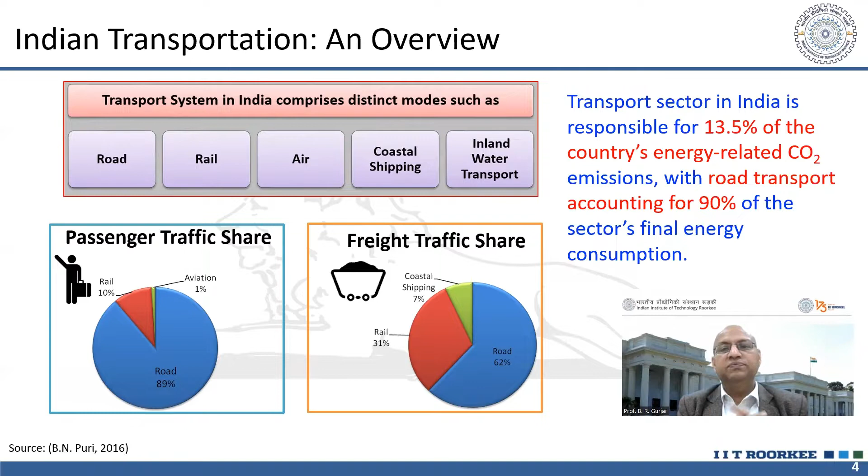If we look at energy-related CO2 emissions, around 13 to 14% of India's energy-related CO2 emissions come from the transport sector. Of this share, 90% of that 14% is basically from road transport. That's why road transport is very, very important to target.

If you look into the distribution of sector-wise action plans under NCAP, which is going on in different states, you will find that transport-related action plans are 38%, and road dust management related is 13%, so total 51% of activities are related to transportation basically. Again, this is a predominant sector, and its significance lies in that.

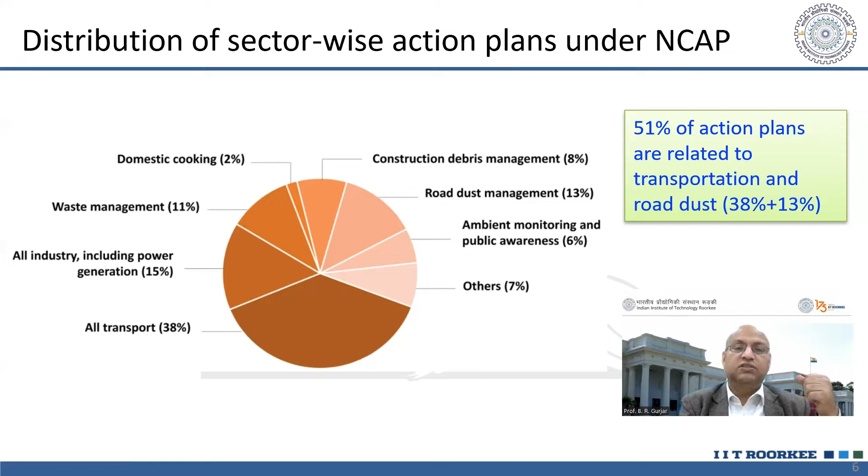I believe, or I hope, that after attending this presentation, participants will be able to understand the correlation between the transport sector and air pollution. There are many other sources, but you will understand the relationship between transport emissions and the air quality of urban areas.

You will also be able to analyze transportation generated air pollution in cities category-wise, such as how much comes from heavy vehicles, or how much from two-wheelers, etc.

You will also be able to appreciate conventional and innovative mitigation measures. Conventional means micro-level focused, short term approaches, while macro-level innovative measures include new urban transportation systems like transit oriented development, BRTS, MRTS, and similar approaches which we will look into.

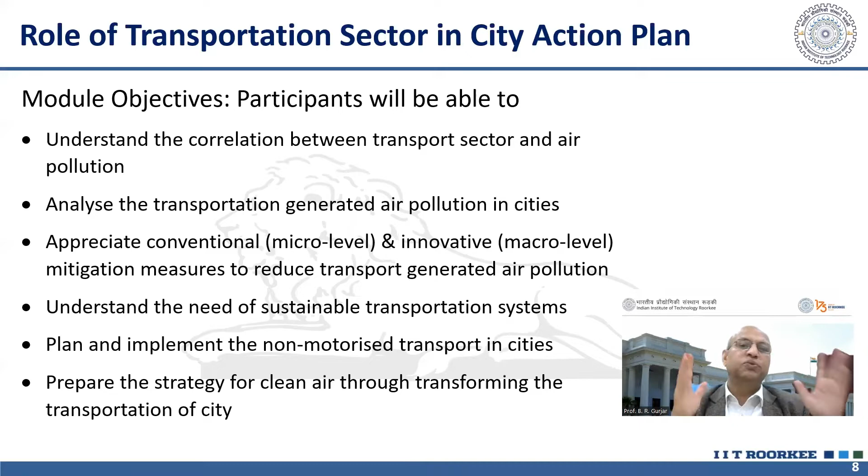So to meet these objectives, we have these modules and sub-modules to look into, like correlation of transportation and air pollution, which will have two sub-modules. One is urban setups and transportation systems in Indian cities, which we will look into because each city has a characteristic kind of transportation system.

Then energy and fuel consumption in transportation, how much there is, and what is their contribution into emissions. Then we will go for practices for curbing transportation generated air pollution.

That will include curbing air pollution through micro level approaches, and curbing air pollution through macro level approaches. Macro level approaches will include focus on non-motorized transportation systems and public transportation modes, as well as transit oriented development like MRTS, BRTS, etc.

We will look at curbing air pollution through technological approach as the third one. We will give one example of electric vehicles. Otherwise, there are other technologies also.

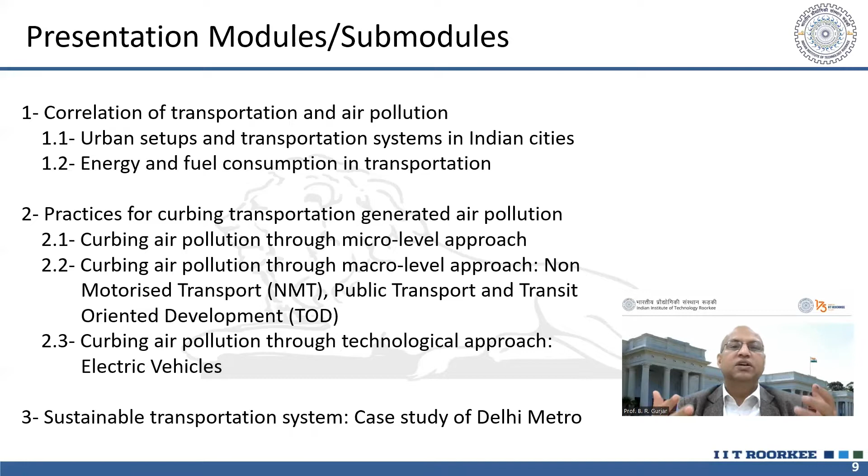When you change the fuel, when you change the engine, even when we go from BS4 to BS6, basically we are using technology to reduce emissions. Then ultimately we will go for sustainable transportation systems with a case study of Delhi Metro, and how it is being used for enhancing sustainable transportation.

So the first module of this presentation is correlation of transportation and air pollution. If you look into the main sources of ground level ambient concentrations of air, that comes predominantly from the transportation sector.

If you look into power plants, they emit at very high elevations, with chimneys or stacks, so their emission comes at high levels. When pollution comes to ground level, it is almost diluted. But transportation related or vehicular emissions are at the height where we are breathing, so that's why it is more dangerous.

Pollutants like CO or benzene are found not only in ambient air but also inside transportation modes like cars. People may think that being in a car means they are safe and not inhaling pollutants, which is a myth. If you measure with good air pollution monitoring sensors, you will find there may be a lot of pollution inside the car also.

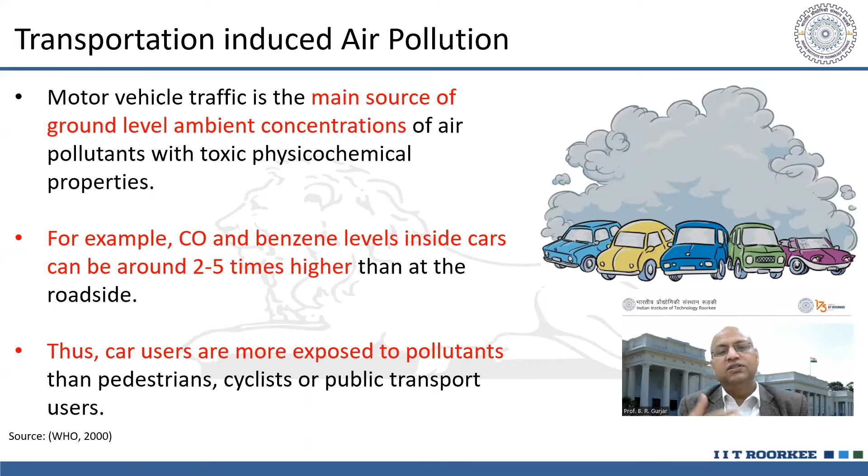There may be other sources of indoor nature, like benzene, CO, or hydrocarbons found in high quantity. When we look into traffic generated air pollution sources, there are exhaust emissions from the tailpipe, and non-exhaust emissions, like resuspension of dust. When a vehicle travels on a poor pavement, dust resuspends and adds to particulate matter.

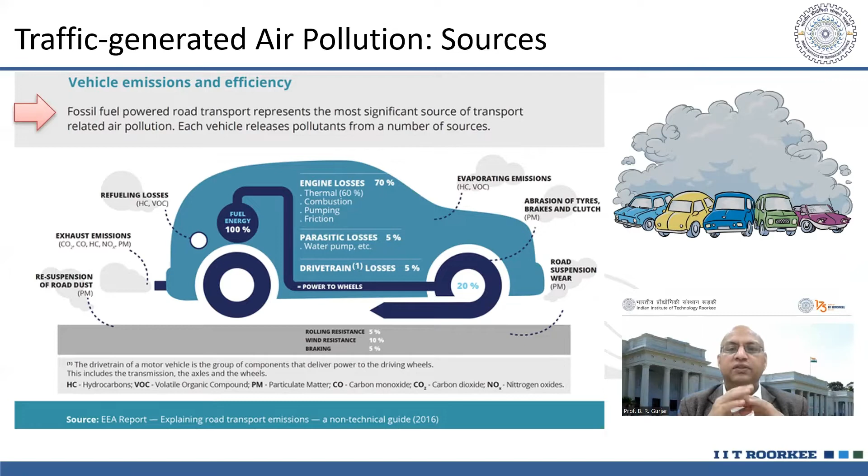There may be emissions from friction of the tire and road, so some sort of pollution will be there. There may be heavy metal emissions from application of brakes. There may also be fugitive emissions from leakage of the engine, fuel leakage, and whenever we are filling our vehicle or car. So there are exhaust emissions as well as non-exhaust emissions.

The pollutants have signatory pollutants for specific sources. For example, if you are given two tables, one having high quantity of particulate matter or SO2, and another with high CO and NOx concentrations, you will quickly say the second table's site could be near a highway, because CO and NOx emissions come largely from vehicular emissions. Pollutants like fine particulate matter, PM2.5, PM10, NOx, CO, and NMVOCs (non-methane volatile organic compounds) come in large quantity from vehicular emissions.

There are other trace emissions also, like methane or CO2, and sulfur oxides are also there, although now we are using ultra low sulfur diesel fuel in several cities.

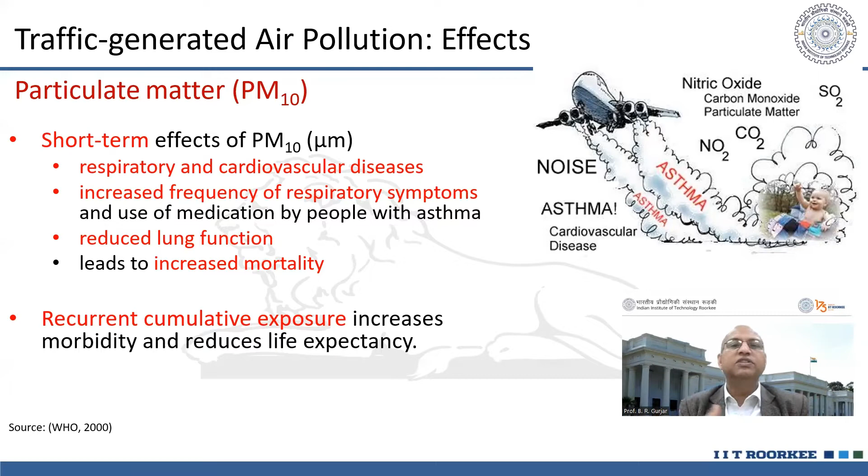If we look into their effects, they may cause several kinds of respiratory problems, like asthma, or trigger other allergy related issues. They can also affect lung function, and ultimately result in cardiovascular problems or even death. So air pollution has very damaging effects on health as well as on the environment.

Environmental effects could be in several forms, like acid rain or climate change, and even these emissions, if they go into the stratosphere, can damage the ozone layer. So the impacts are multifold, and in many ways you can relate the negative impacts of air pollution.

When we go for determinants of traffic generated air pollutants, which govern or influence how much emission of these pollutants will come from the vehicular fleet, there are factors like how many vehicles are on the road. So the number of vehicles will determine how much pollution is there.

Age of the vehicle matters, because if you are driving an old vehicle, it will emit more emissions, while new vehicles emit less. Maintenance and inspection related issues may also arise, and that's why old vehicles are discarded after some time, because they are highly polluting or highly emitting sources.

Then engine type and condition matter, like for example 2-stroke versus 4-stroke engines in two-wheelers. When fuel efficiency is good, per kilometer emissions may be less. That's why people are going from 2-stroke motorcycles to 4-stroke nowadays, and most two-wheelers are now four-stroke engine-driven vehicles. So engine type also influences the emissions.

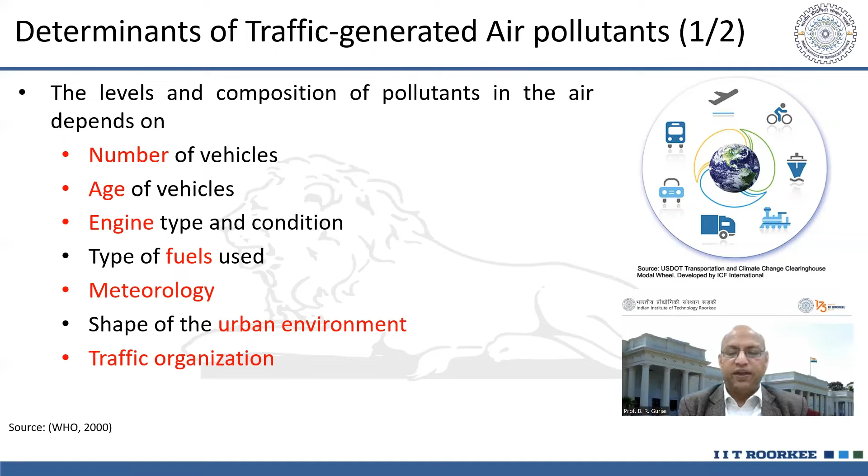Similarly, the nature of the vehicles matters - heavy vehicles, trucks, etc. emit a lot more pollutants compared to light vehicles. For example, when comparing a car with catalytic converter, a diesel truck produces around 50 to 100 times more fine and ultra fine particles per kilometer traveled. So the size or type of vehicle is also responsible for this variation in traffic generated air pollutants.

Modern diesel engines emit less PM2.5, but a larger number of ultrafine particles than older engines. This is tricky, because the mass concentration is reduced, but the particle number is increased. So you may be inhaling more small, ultrafine particles, and that may be more dangerous. It is under research nowadays whether those engines are good or bad, and this debate is going on because more data is needed to conclude.

But of course, if we are inhaling very ultrafine particles, even if the mass concentration is less, those particles have the chance to go into our blood cells, and they may have negative impacts on our respiratory system, lungs, etc. They can go into blood, and if they are toxic or carcinogenic in nature, they can create other problems. So ultrafine particle number, rather than particle mass, is more important. We have to give due consideration to them, as they have very adverse health effects.

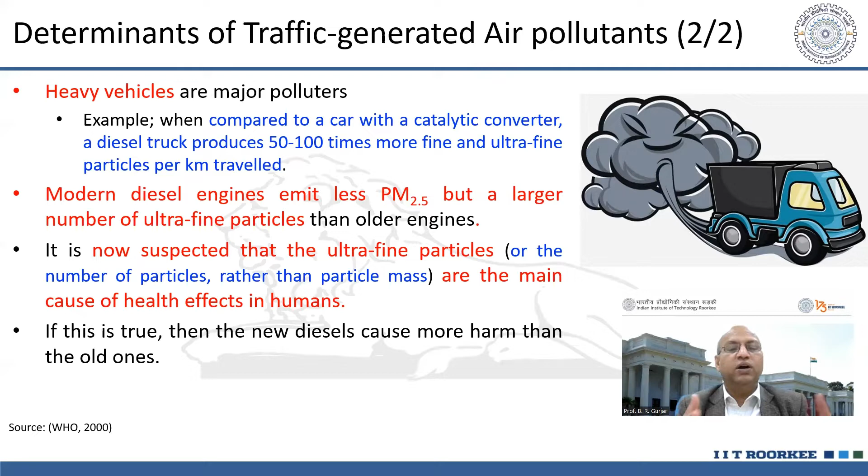That is why new diesels cause more harm than the old ones. This kind of opinion is going on in the community of researchers.

When we talk about health and environmental impacts of air pollution, physical activity is restricted when we are not in good health. If we have respiratory problems, sneezing, irritation, eye irritation, running nose, etc., we are not able to focus on our work, and our efficiency decreases. There may be asthmatic problems also.

In winter, a lot of pollution is there. Some allergens may be there, and people get into the trigger of allergic reactions. Cardiovascular diseases could also be there, and there is literature which links air pollution to lung cancer, or ultimately mortality. It can reduce the average age also.

As you know, like food or water poisoning, they give immediate effect. If you have consumed contaminated food or contaminated water, you will have some problem like loose motion, those kinds of things. But if you are inhaling this polluted air, unless it is very acute exposure, like the Bhopal gas tragedy that happened, otherwise small concentrations if we are inhaling, then slowly it gives us very negative health effects.

Maybe in polluted cities, the average age is decreased by 5 or 10 years. You don't know where those years have gone, and it has been taken by the air pollution.

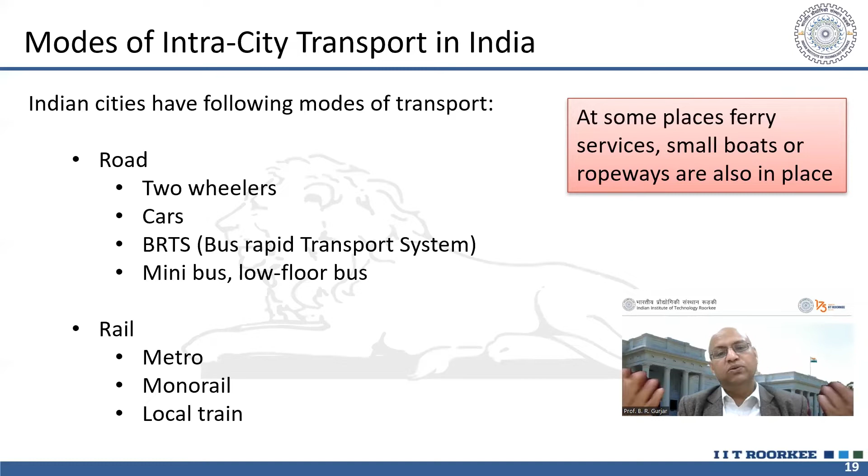Now, if you talk about urban setups and transportation systems in Indian cities, as I said earlier, road transportation is the dominating sector, meaning two-wheelers in large number, cars, or BRTS (bus rapid transport system), or mini buses, low floor buses. If you talk about rail, then it is like metro, monorail, local rail, several kinds of rail. Now high speed rail is also coming, and people are also talking about hyperloops, but they are in experimental stage.

So naturally that leads to high pollution levels. If we talk about the share of the types of motorized vehicles in India, two-wheelers are responsible for around 75% share in Indian transportation, followed by private cars.

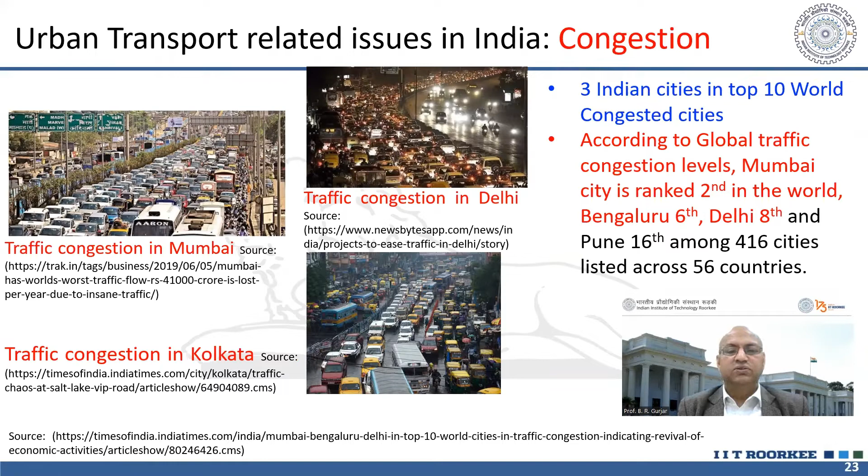If you want to visualize the stage of congestion, 3 Indian cities are considered among the top 10 world congested cities - Mumbai, Bengaluru and Delhi at 2nd, 6th and 8th rank among the 10 most congested cities in the world. These situations warn us that we have to do something to relieve the space in these cities.

When we talk about air pollution, we have earlier also seen that the transportation sector, basically road transportation, is responsible for more than 90% of CO2 emissions. The second is civil aviation, and then railways. So huge scope is there to do something about road transportation to reduce the emissions.

When road accidents are considered, around 151,000 fatalities occur annually. This is a huge figure, and they are mostly young fellows, which is a kind of tragedy - the whole family gets disturbed and affected. India accounts for around 6% of global road traffic incidents or accidents, and 70% of accidents involve young Indians, which is a very pathetic situation.

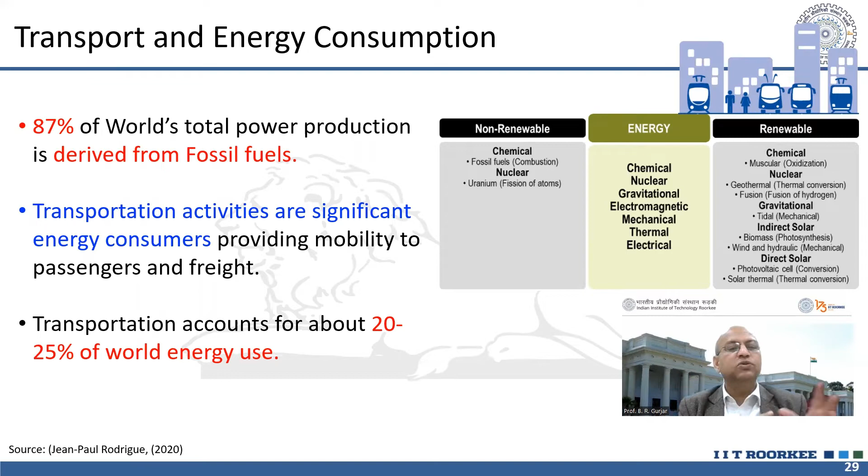Transportation activities are significant energy consumers. Out of the energy produced by fossil fuels, renewable resources are only 13% on average. So a huge quantity of fossil fuel is being used to produce energy, and a larger share of that energy is also being used by the transportation sector to provide mobility to passengers and to transport freight. Transportation accounts for around 20 to 25% of world energy use, which is huge.

If you look into this, petrol is almost 99% consumed by the transportation sector. So two-wheelers and cars are the major consumers of petrol or gasoline. So if we can shift the population from two-wheelers or cars, we can really win the war to reduce the consumption of petrol in that sense.

If you look into diesel, private cars - people use it because diesel has been cheap earlier, still now there is a little bit of difference, but it is still cheaper than petrol. So many people use diesel driven cars. Then trucks, of course, use diesel. So the larger share of diesel is being used by this particular transportation mode, which we can reduce if we shift freight onto railways or inland waterways. You can see the largest diesel consumption, around 28%, is by heavy commercial vehicles and light commercial vehicles.

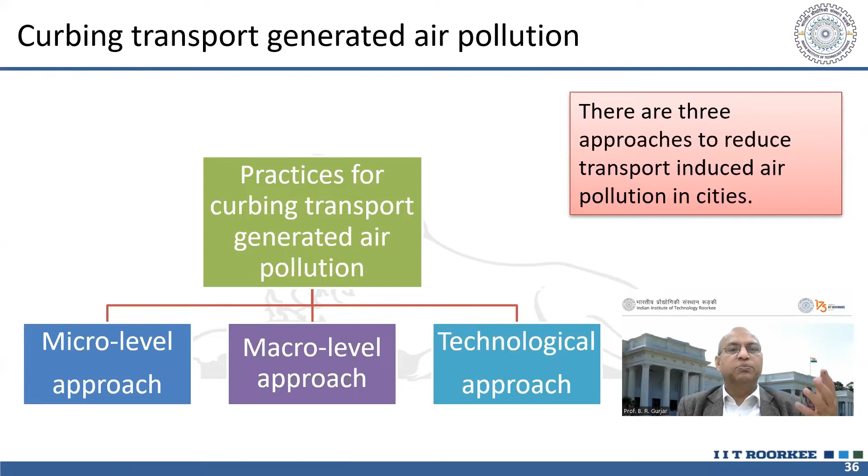Now we come to the second module of this presentation, which focuses on practices for curbing transportation generated air pollution - how to curb, how to control, how to reduce. There are three approaches basically: one is micro level approach, the second is macro level approach, and the third is technological approach. So these three broad categories we will discuss.

What is curbing air pollution through micro level approach? Look into this - we can implement wall-to-wall pavement if soil is loose and pavement is not covered properly, to reduce the resuspension of dust-related emissions. Also, we can do black topping of metallic roads so that smooth drive is there, and non-exhaust emissions can also be reduced, as well as resuspension of dust will be reduced.

Creation of green buffers can reduce the dispersion of pollutants from a particular distance. Maintenance of forest cover, urban forest can be there - as people say, the Ridge in Delhi is the lungs of Delhi. So in each city, those kinds of parks or greenery or green belts, as well as small forest covers, can be there.

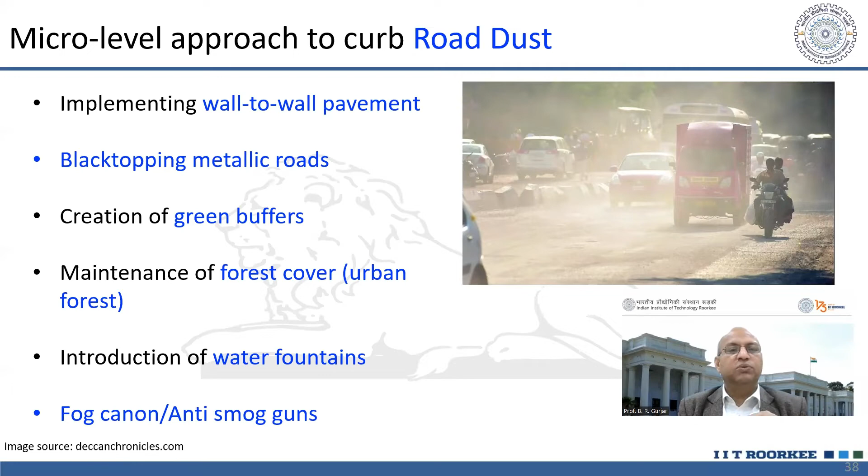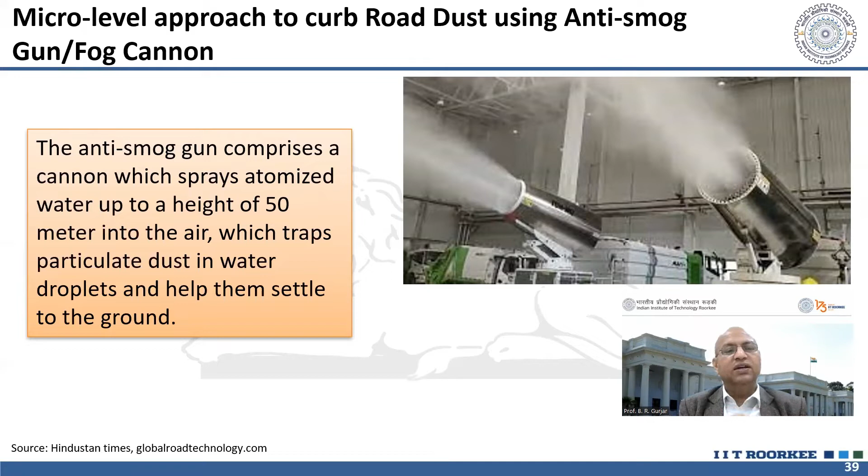Then introduction of water fountains where a lot of particulate pollution is there, so that can help bring down particulate pollution through deposition. Fog cannons, anti-smog guns, have been used at certain places - I'm not sure about their effectiveness or efficiency. This gun and fog cannon basically sprays a lot of water up to a height of 50 meters, and the droplets get into contact with particulate dust, and then by gravity it settles down, so that way it can clean the environment. But I don't know the efficacy and efficiency.

Micro level approach to curb traffic induced air pollution can also be through expressways, so that if people are going to some other state or city, and your city is in between, they don't need to cross your city. Like in Delhi now we have the Eastern Peripheral Expressway and Western Peripheral Expressway. So if somebody is going from UP to Rajasthan, they don't need to cross Delhi - they can go by these expressways or peripheral roads. This can avoid heavy traffic, and a lot of emissions from heavy traffic can be avoided. It can also reduce traffic congestion and minimize excess pollution because of traffic jams at particular points, and this can be done through widening of roads also.

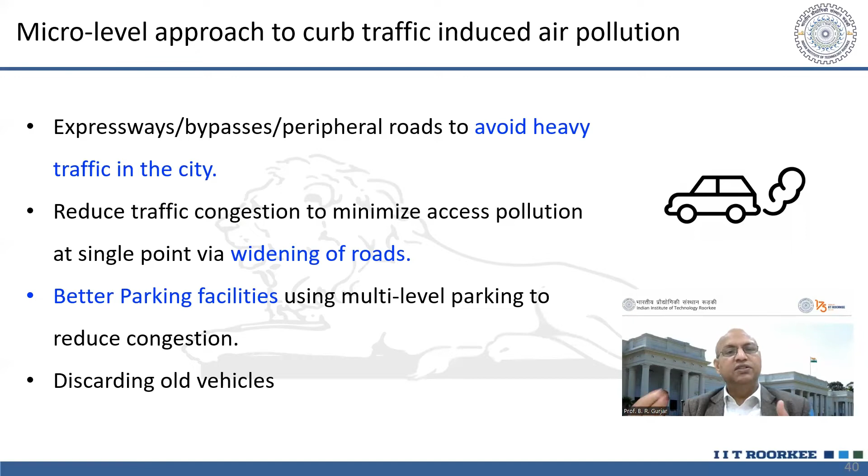We can also go for discarding old vehicles, so that if we go for new vehicles, emission is less. But affordability should be there, so maybe some mechanism can be there like easy loans. Those are the policy matters which government can look into.

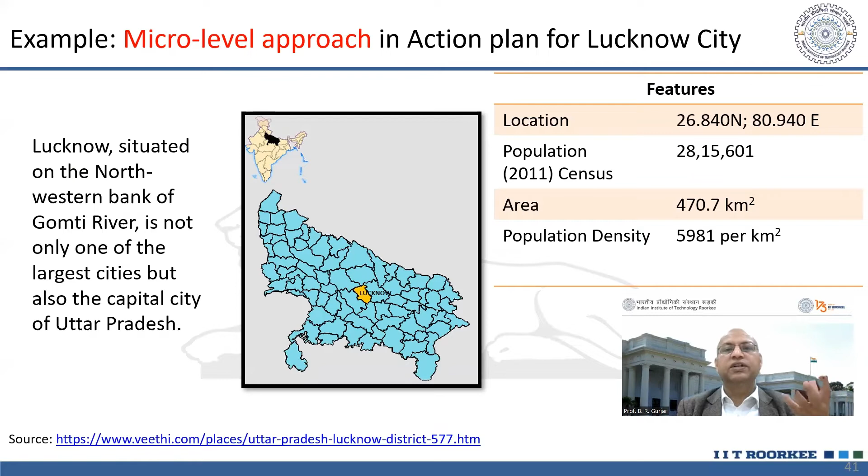If you talk about a micro level approach action plan as an example, we can look into Lucknow city, which is one of the largest cities of UP and the capital city also. Looking into the sources of air pollution, this report where we have taken data says that road dust is the dominating source in that city.

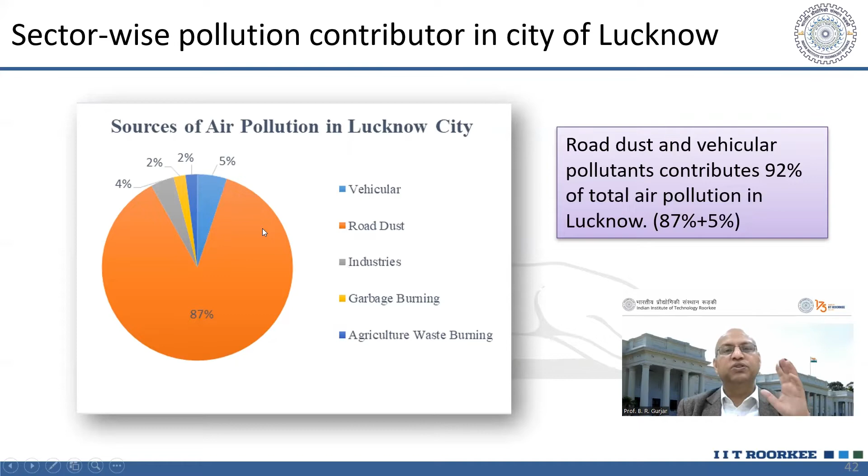92% in total, which contains 87% road dust, and 5% comes from vehicular pollutants. So the total is 92%, which we can control if we go for better transportation infrastructure. Looking into micro level approaches...

It can be through widening of the bottleneck where traffic gets congested. Then construction of some peripheral road is recommended. Arrangement of multi-level parking facilities is needed so that, as I said, people don't need to park in odd spaces.

Extensive launch of campaigns can be there where strict compliance of rules and regulations is ensured, and other implementation of plans, for example 33% forest cover area in the city master plan, should be implemented in letter and spirit. Canal side roads should be brick lined and proper plantation carried out so dust emissions can be significantly reduced.

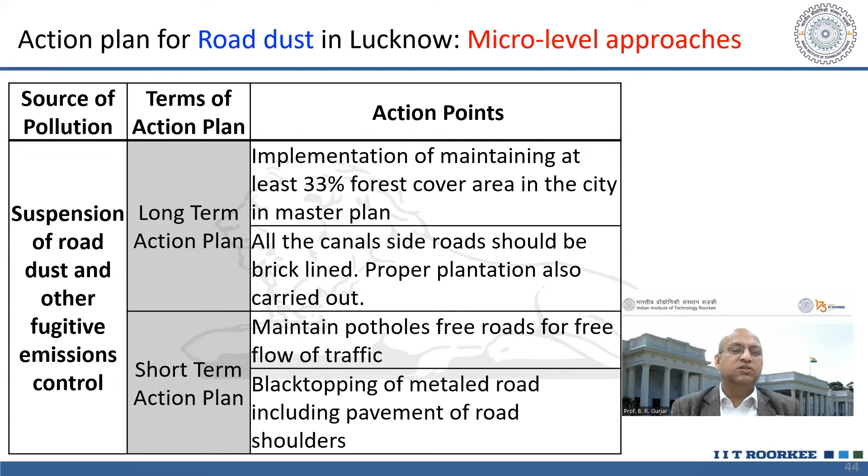There are several places where potholes are there, so a maintenance mechanism must be there to make roads free from potholes, ensuring free flow so people don't need to apply brakes everywhere and the road stays smooth. Then black topping of the metal road, including paving of the road shoulders, is required for better road infrastructure.

Next is curbing air pollution through macro level approach, which includes non-motorized transport (NMT), public transport, and transit oriented development. NMT is basically rickshaw, cycling, or walking, and this is a very healthy way of doing this. If we can integrate different modes of transport, then NMT is the best.

Let me share the experiences of Germany. They have dedicated lanes for cycles and pedestrians, so people feel motivated to use them. Their transportation systems like buses and trains also have space for bicycles—you can take your bicycle with you, get down at the station, and go to office by bicycle. That kind of integration of infrastructure is needed for promoting NMT, and mobility through NMT is healthy because it's like physical exercise.

When we talk about non-motorized transportation trends, if you look into Delhi or Bangalore, the NMT share is basically decreasing, except in a few cities like Chennai or Patna. That means people don't have the infrastructure facilities which can encourage them to use these modes of transport. And people blame rickshaws for causing congestion on the roads, but basically the reason is mixed traffic.

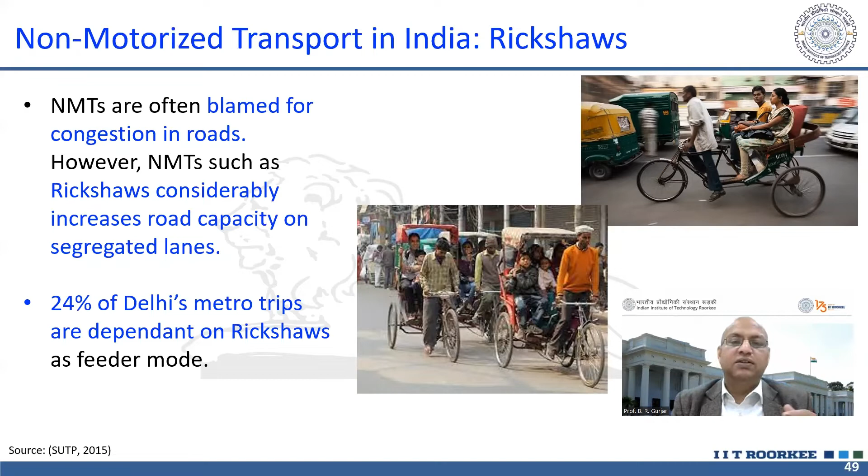If we have segregated and dedicated lanes for rickshaws, they are a very good mode of last mile connectivity—they can take you to a particular station where you can access public transportation. Around 24% of Delhi's metro trips are basically dependent on rickshaws, so you see their significant role. These erroneous perceptions about rickshaws causing congestion should not be carried; rather, poor planning is the reason for that congestion.

If we talk about key policy initiatives by the Ministry of Urban Development, for example, the first two principles of the National Mission for Sustainable Habitat included walk and cycle, basically, in the action plan of the Prime Minister's National Action Plan on Climate Change.

So a lot of stress was given on walk and cycle. If you talk about the vision of the National Urban Transport Policy, that also included NMT. Emphasis was given on NMT, that last mile connectivity must be through NMT basically.

The Ministry of Urban Development has developed service level benchmarks for urban transportation in Indian cities, which integrates NMT with other systems. For example, you can have cycles at certain locations where people can use them, and there are ways to hire or rent them.

So there have been several policy initiatives. For example, the Jawaharlal Nehru National Urban Renewal Mission 2005 focused on large-scale infrastructure projects, including urban transportation, which requires NMT as an integral component of that transportation planning. In 2006, this was adopted, and emphasis was given to developing infrastructure to promote NMT, as I said, the dedicated lanes or other issues.

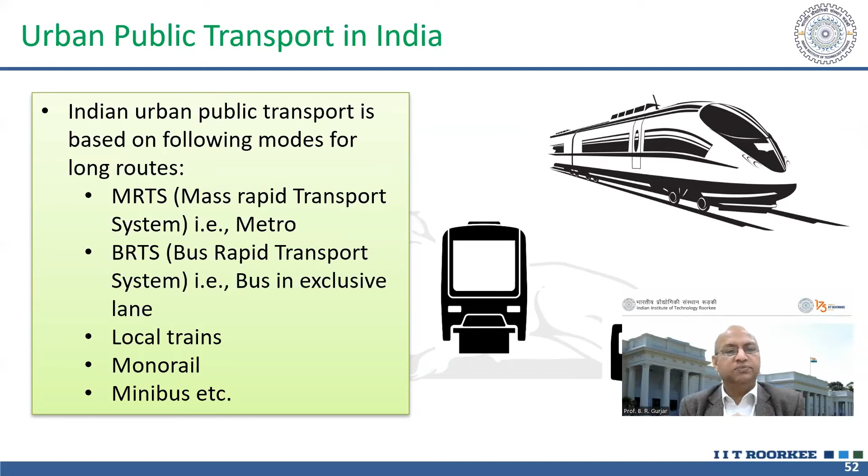When we talk about urban public transport in India, the popular ones are MRTS, Mass Rapid Transport System, that is metro; BRTS, Bus Rapid Transport System, which has exclusive bus lanes; local trains; monorail; or mini buses. All these are part of the urban public transportation system.

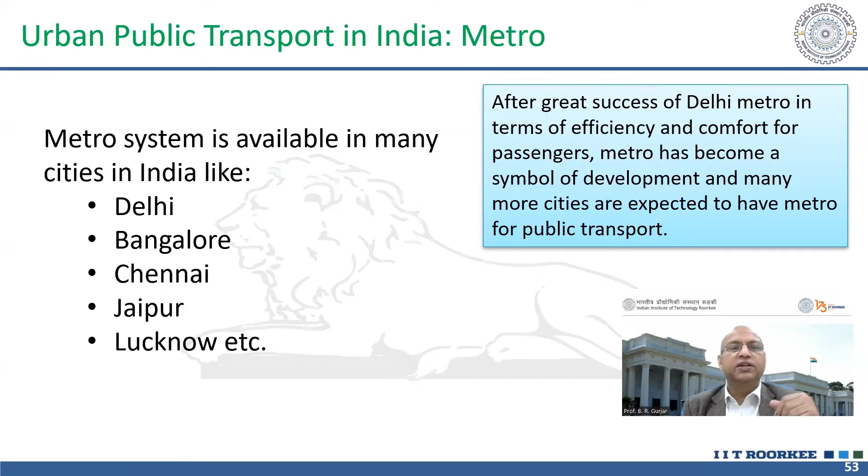When we talk about metro, this system is available in several cities like Delhi, Bangalore, Chennai, Jaipur, Lucknow, and other cities are also demanding metro, looking at the success story of the metro in Delhi and other cities. BRTS system has come up in some other cities because BRTS is quite cheap if you compare the investment to MRTS.

So like Surat, Ahmedabad, Indore, they are having a wonderful BRTS system, although it failed in Delhi, and there are several reasons for that. I don't want to go into that, but BRTS system is one good urban public transportation system.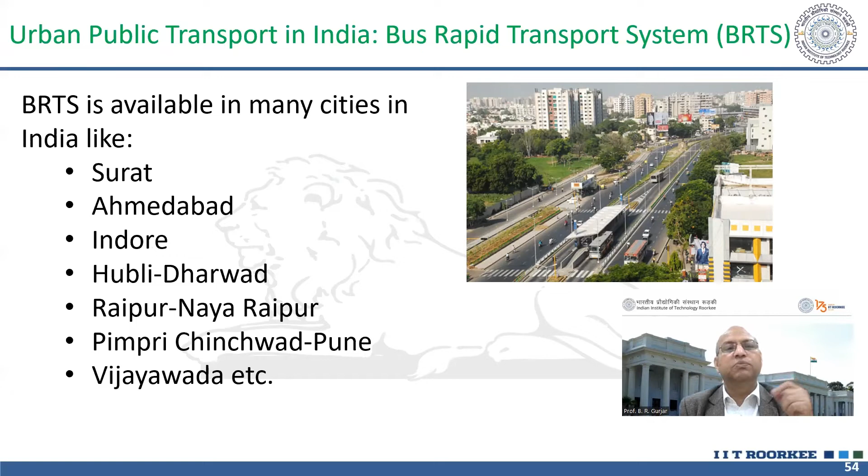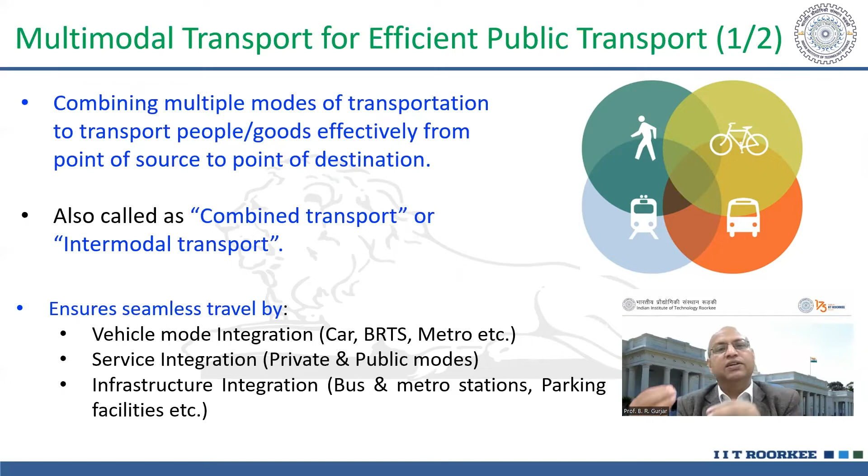Then people are talking about multimodal transport for efficient public transportation, because when we connect BRTS with feeder buses and then last mile connectivity through NMTs, then a multimodal transportation system can be developed.

From home, maybe you can use your car or some rickshaw. You reach a bus station or the metro, and you can then use the bus, feeder bus, etc. So that way it is interconnected. Ultimately, you can also walk to the destination, which may be a commercial center or your office.

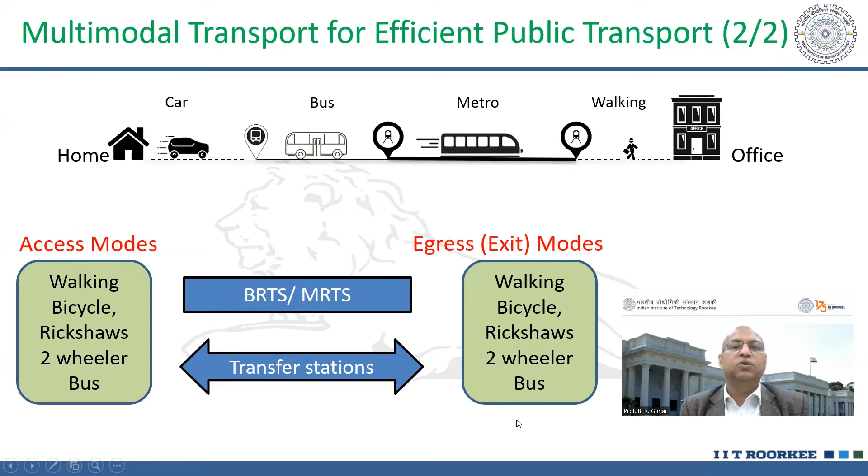So walking, usage of bicycle, rickshaws, two-wheelers for accessing those modes of transportation, whether it is BRTS or MRTS, and again exiting and using those NMTs. So that kind of connectivity of multimodal transportation system is the need of the hour.

Now, if you talk about transit-oriented development, which is a very new concept of land use planning, one particular stretch is developed in terms of BRTS or MRTS of very huge capacity for public transportation, and along that corridor a lot of development occurs. So that is the new concept, and it is being used in several metro cities.

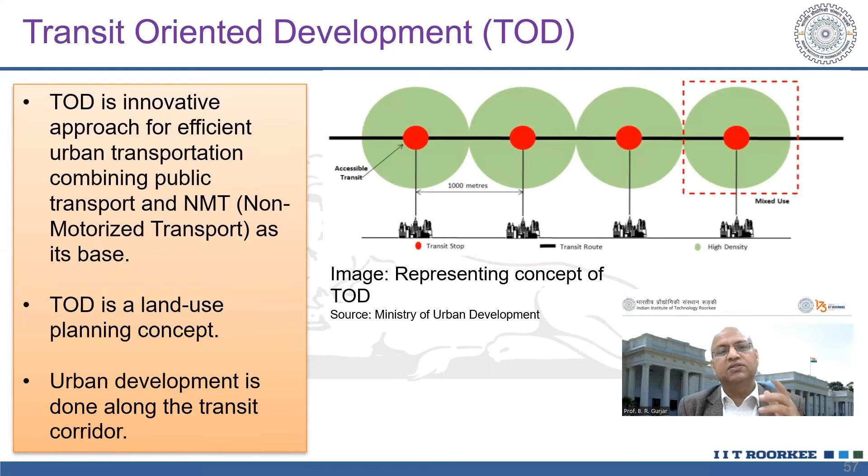Wherever this MRTS or BRTS system is there, TOD is the one thing which can easily be integrated. So creation of compact and walkable spaces where pedestrians can walk freely without any fear of accidents, and mixed use communities are centered in and around high quality train or bus systems. So this is where TOD emerges and comes into practice.

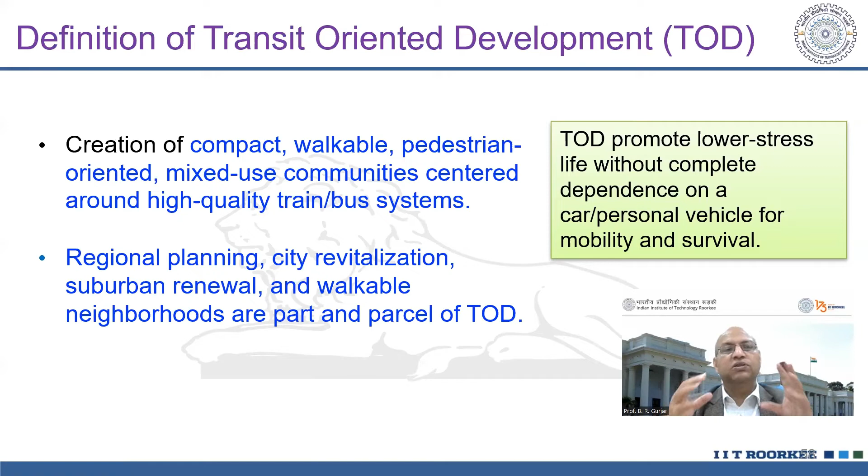So regional planning, city revitalization, suburban renewal, or walkable neighborhoods are part of this TOD or transit oriented development system. There are several benefits of TOD, like better access to live, work, and play, or having high quality of life, because there is a very reliable, very fast commutation system in terms of BRTS, MRTS.

You don't need to travel through your car or your vehicle, which creates a lot of stress. Comfortable journey can be through MRTS. So quality of life also increases when you have less stress and you don't get exposed to polluted areas. Greater mobility, ease of moving is there, and increased transit ridership because it carries a lot of people.

This also results in less congestion or less emissions, because when private vehicles are moving, they run on fossil fuel and emit a lot of emissions. But when you are using public transportation system like MRTS, per capita emission is very low and there are fewer accidents. When less traffic is on the road, congestion is less, accidents are less, injuries are less, deaths are less.

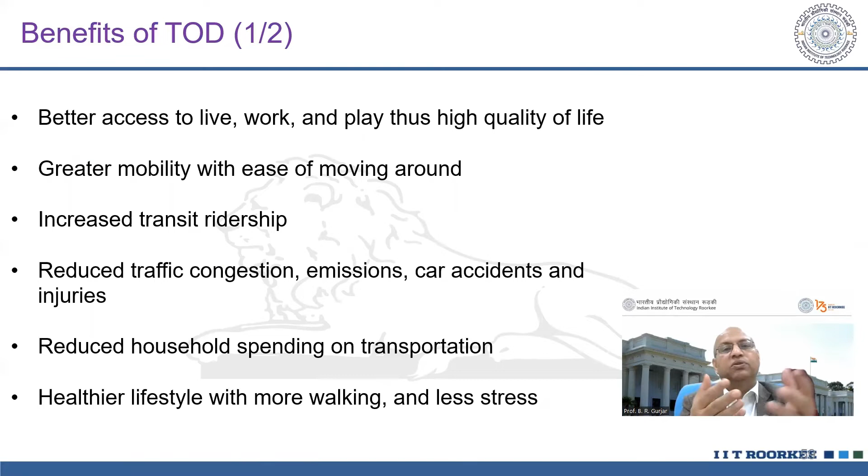Reduced household spending on transportation can easily be achieved by this TOD. It promotes a healthier lifestyle because you can walk or use NMT for reaching the metro station or bus station. That way it is healthy because it provides facilities in your neighborhood. You don't need to go by your car, etc. You can easily go through NMT also, like rickshaw.

Higher property values occur because when development happens in and around this TOD system, prices of property increase. Then there's increased foot traffic and customers for area businesses, because people walk and the area has mixed use. You can meet several kinds of demands. Reduced pollution and environmental damage are co-benefits.

It does not encourage horizontal sprawl, rather it goes for vertical development, so many people live in densely populated areas, in a comfortable way, in good vertical flats, etc. Then they access these transportation modes. It also gives better economic opportunities, because you reach your destination, office, or workplace on time and very fast.

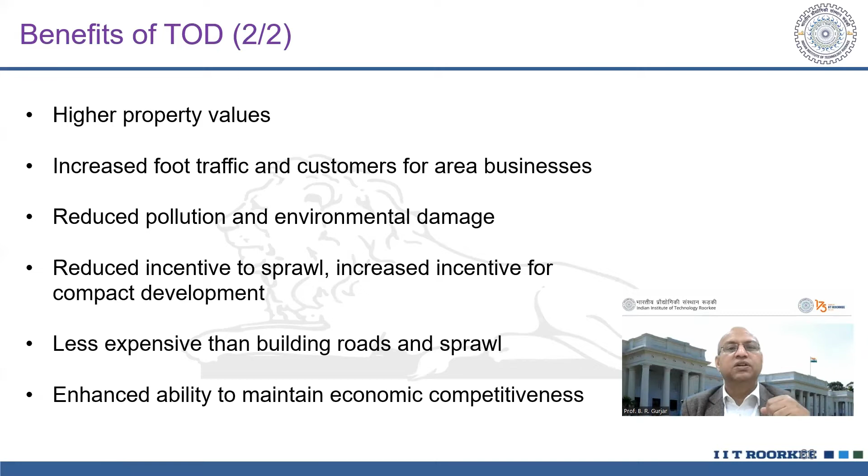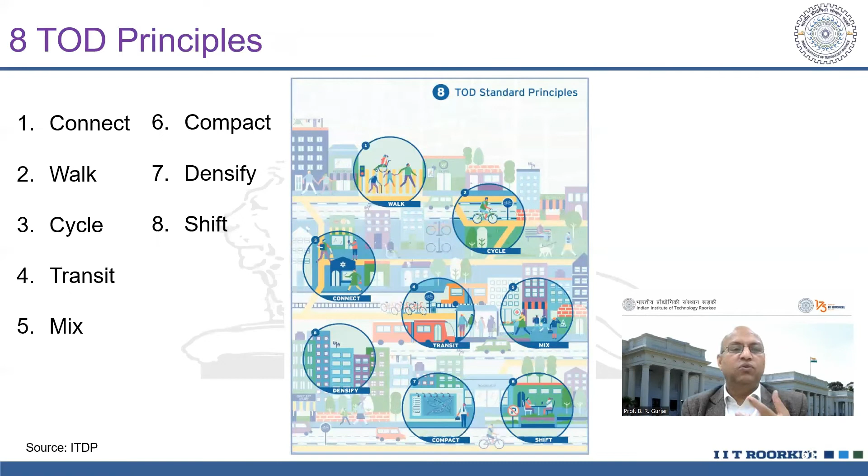There are 8 principles basically used for this TOD, transit oriented development: connect or walk, cycle, transit, mixed use, compact development, densification of the population, and shifting from privately owned vehicles to the public transportation system.

Connectivity is there in those areas, and a greater amount of access is granted to most of the people. It is inclusive, connection is there for all segments of people, because MRTS can be used by poor people too. Otherwise, cars you can afford only if you are of a good income group in society, but poor people can't afford cars. MRTS, everybody can afford. So that way it is an inclusive and equitable mode of transportation.

Each station increases reach into the larger community, and the economy thrives because of that. Walking is encouraged because very short distances are needed to go to the station, or to the shopping center, mall, educational institutions, or wherever. Very short distances can be planned in that transit oriented system.

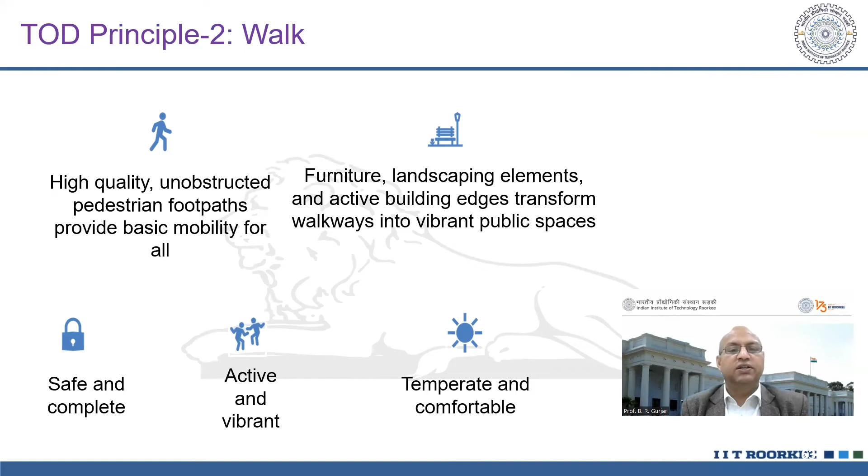Cycling is encouraged because dedicated lanes can be provided in those localities. When you have fewer cars or privately owned vehicles, you have a lot of empty space that can be used for dedicated lanes for cycling, for pedestrians, and some shading trees can be planted, so that in summer people can walk without sweating. You can think of many means and apply many things creatively in that sense.

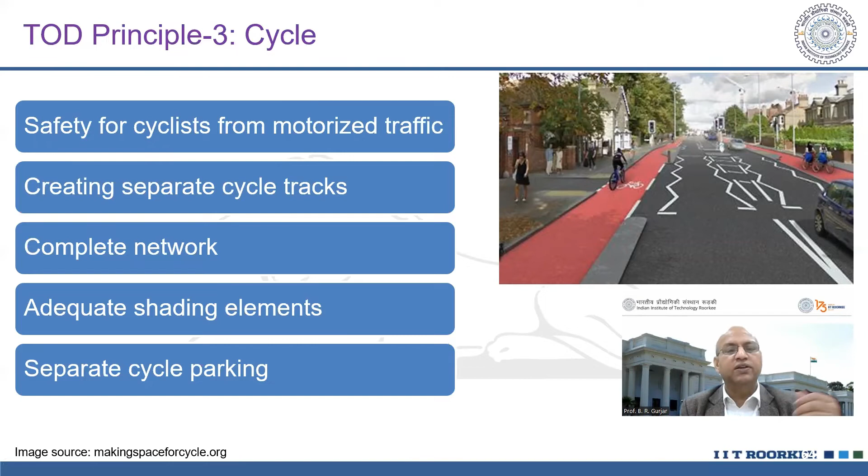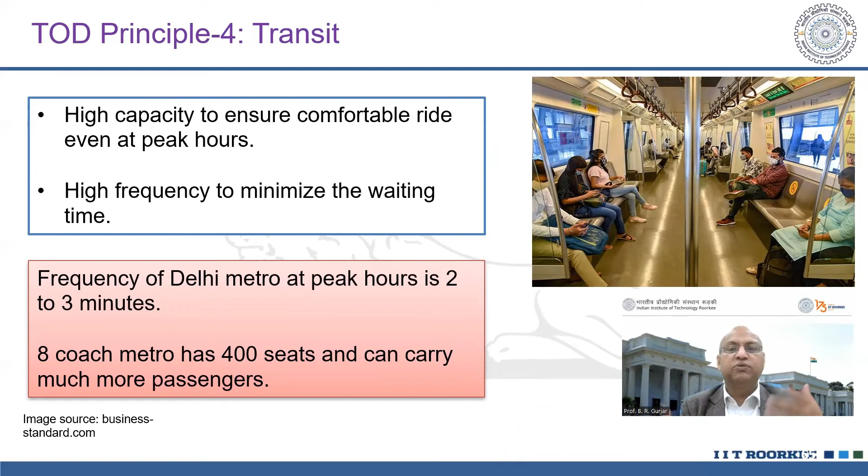It also promotes the transit system, because high capacity MRTS or BRTS systems are there, so a lot of people commute using them. Frequency can also be adjusted depending on high or low demand. Like Delhi Metro, in peak hours, there's a 2 to 3 minute frequency - after 2 or 3 minutes you get another metro, so you don't need to wait long. Capacity is very high, because an 8-coach metro has around 400 seats, and frequency is very high, so a lot of people can move within a shorter period of time.

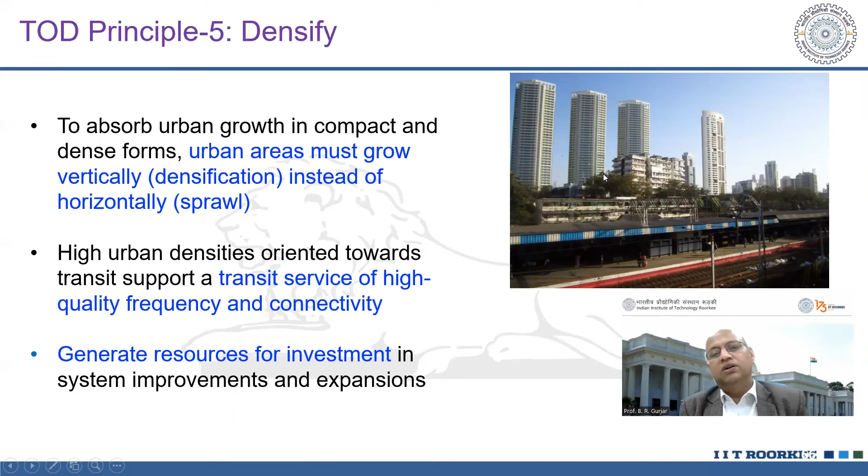Densification is there - not horizontal sprawl, but densification with high-rise buildings that can be constructed, so many people can live in those buildings. So they don't need to travel horizontal distances, rather they will walk to the station, or hire a rickshaw and go to the station, as it is in a nearby location.

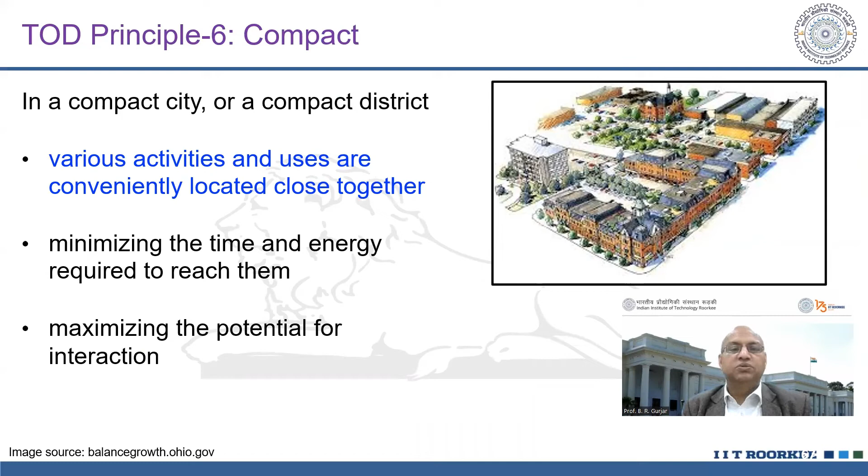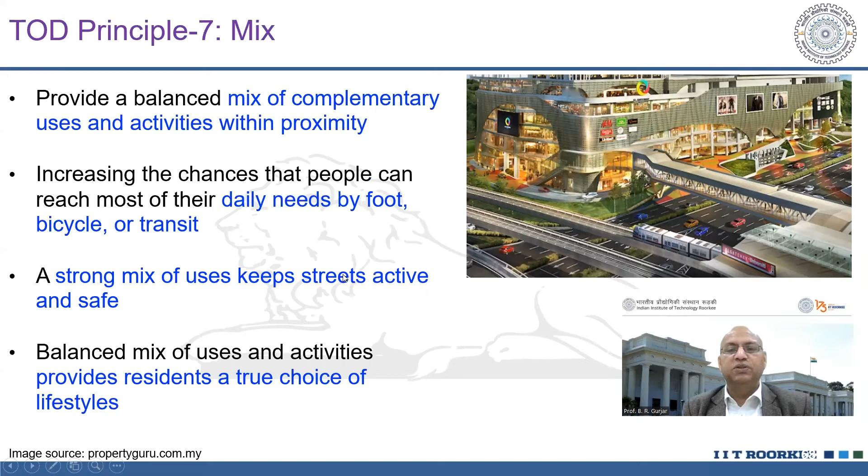Compact development is there because there are many things within that particular area, so you can meet different kinds of demands there. Mixed development is there too - so at a particular place you go, you will have complexes for entertainment or shopping, many things are there. So mixed development can again help you do your other things in minimum possible time.

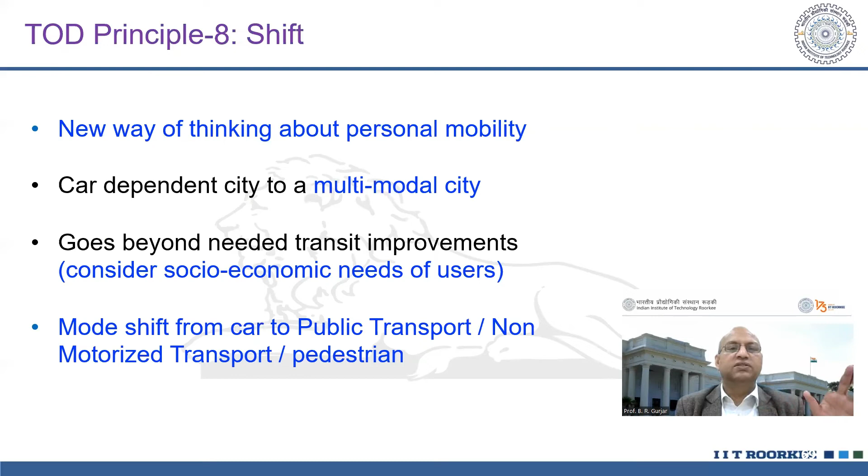Shifting, as I said, from personal mobility like cars to multimodal transportation by using public transportation systems and non-motorized transportation or just walking. This kind of shift from cars and two-wheelers, in a good sense, can result in much less emissions and a more comfortable journey.

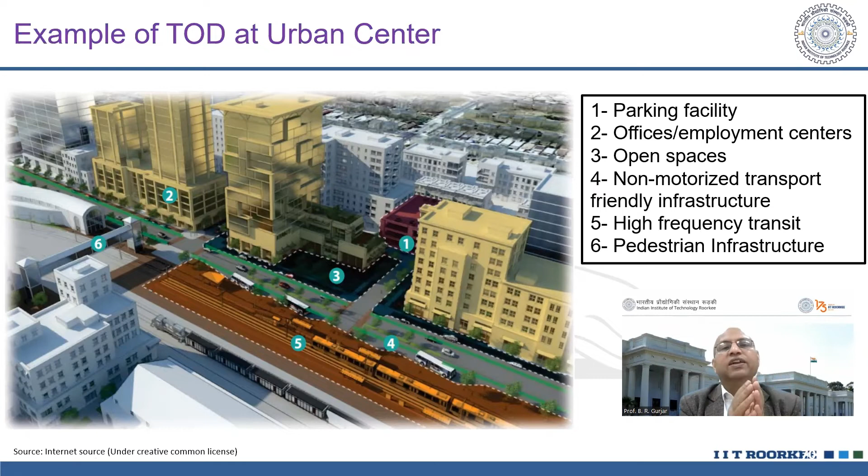Then if you want to go from one side to other, pedestrian bridges may also be there. So that kind of integrated development can be ensured, and distances are very short, so you can easily walk and go from one place to another.

So for the planning of the TOD, basically you have to look into the opportunities, how much ridership may be there, how many trips can be generated, or what are the constraints, whether land use patterns are there to support the transit system or not. If land is expensive, then it is difficult, otherwise you have to spend a lot of money.

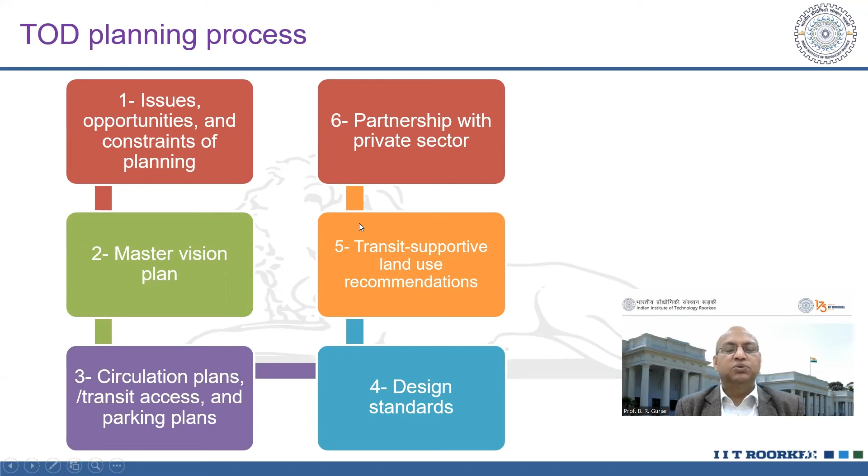Then private partnership can be encouraged, so that investment comes from the private sector also. So you can see this, from looking into the opportunities to changes in the master plan, and then go for meeting the design standards and integrating the land use plan to support the transit systems, and also inviting the private sector to take part in those developments, so that they can also get benefit out of that activity.

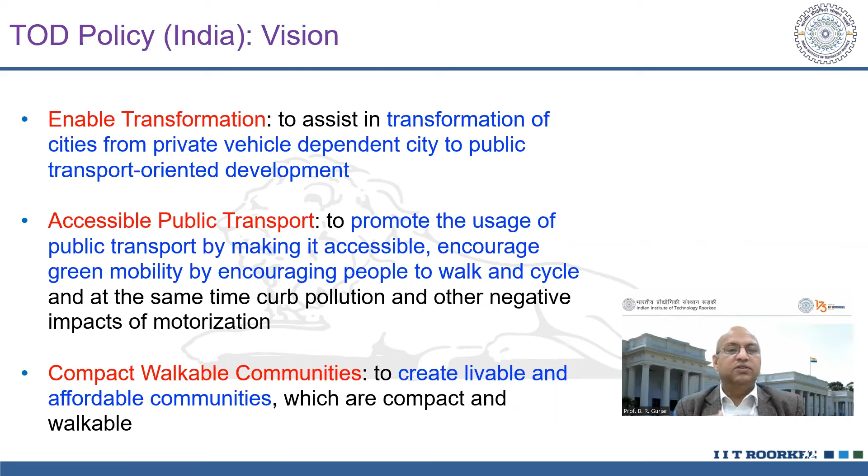TOD policy in India is being encouraged because it is enabling transformation from privately owned vehicles, or the dominated scenario of privately owned vehicles, to public transport oriented development. It also encourages accessible public transportation systems, easily accessible for all kinds of people. It is designed that way, it is affordable, and it is quick also. Then it also encourages walkable communities, so that people are healthier.

Now we come to curbing air pollution through technological approaches, for example electric vehicles. Electric vehicles, as you know, have no exhaust emissions, they are very clean in that sense, and you need electricity to charge the battery. If electricity is produced from renewable sources, this is a wonderful option, because it will not emit anything from tailpipe emissions. There is basically no tailpipe emission.

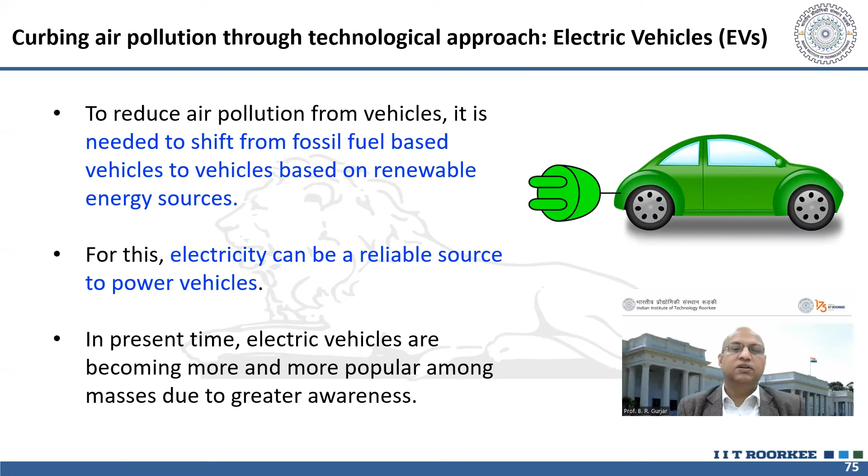And there are a lot of policies from the government of India which are pushing e-vehicles in our cities. So you look into the clean source of energy, because electricity is a clean source of energy if we are taking it from solar or wind, etc. If it is from thermal power plants, etc., then this is an issue, because you are shifting emissions from cities to other places.

But still, I always say that those emissions which we are shifting have a great advantage, in the sense that those emissions were at breathing level from these vehicles. Now the emissions, if they are from coal-based thermal power plants, will be released through stacks at very high levels, so those will be diluted basically. But greenhouse gases are an issue, and if you can't capture them, then it is a difficult issue.

Well, so there are several benefits of electric vehicles. You can see there are no exhaust pollutants or greenhouse gas emissions, unlike IC engines.

Conversion of energy is not so efficient as in case of electric motor. This converts energy into motion very quickly, very efficiently.

You can say EVs are zero tailpipe emission vehicles if the charging of batteries is through renewable sources. That's why we are in parallel also increasing solar power and wind energy, increasing these renewable resources day by day in capacity and intensity.

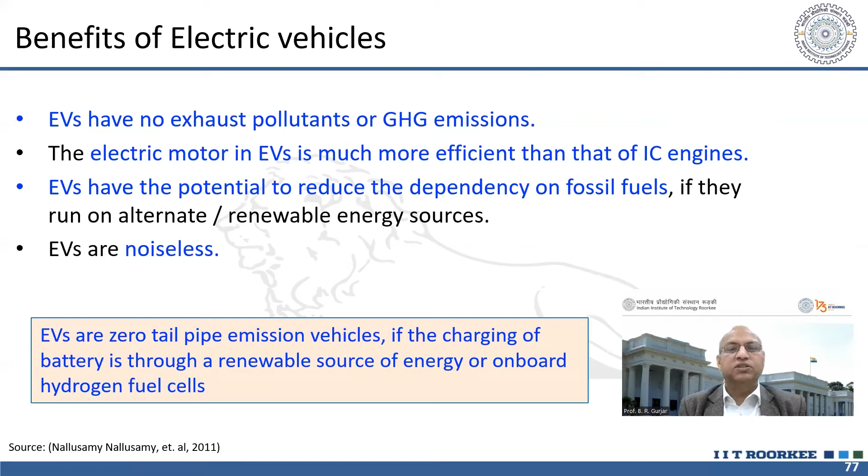If we talk about Delhi government's draft notification for e-vehicles in February, they gave directions to the transport department, asking that all aggregators or delivery service providers like food delivery, e-commerce logistic providers, couriers, etc. should adopt electric vehicles in terms of new onboarded fleet as per proportion, so that their use increases.

Within 3 months from this notification, 10% of two-wheelers should go for electric vehicles, and up to 31st March 2023, 50% of two-wheelers should be converted. For four-wheelers, the target is 5% in 3 months and 25% by next year. So the impact on air quality is much better because there is no exhaust emissions.

But as I said, there are issues related to energy sources, because if we are getting it from coal-based power plants, then particulate emissions or SO2 emissions will be there. So we need good electrostatic precipitators to capture particulate emissions, and scrubbers for reducing SO2 emissions.

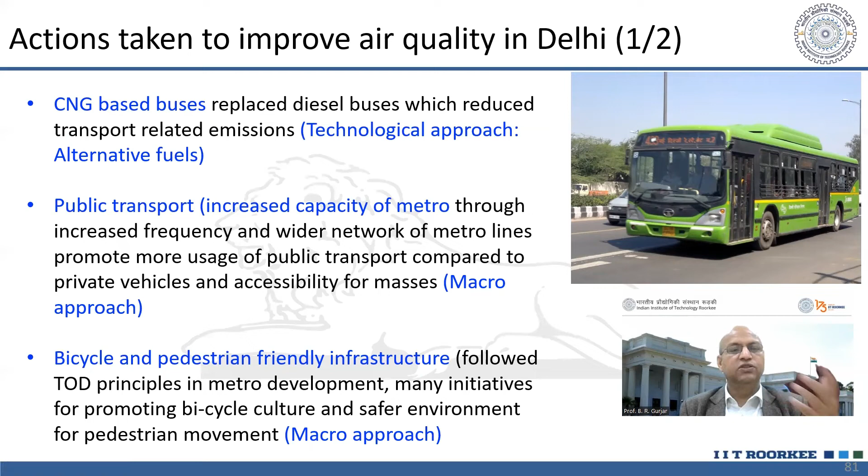Similarly, bicycle and pedestrian friendly infrastructure through TOD was also promoted, which is again a macro approach. So this case of Delhi has inclusion of several interventions of these approaches which we have discussed.

Other approaches like reducing the retirement age of heavy diesel vehicles were a kind of micro approach, and usage of e-rickshaws for last mile connectivity was encouraged, which is a technological approach. Similarly, the odd-even scheme was followed for certain periods, a micro approach, though results were debatable.

Smog towers and intense air quality monitoring have also been there on an experimental basis, which is another technological approach. Water sprinkling in worst cases of dust pollution is a micro approach. And a pilot study has been conducted to create an EV charging network, another technological approach.

So that way, macro level approaches and technological interventions have been implemented in Delhi to improve air quality.

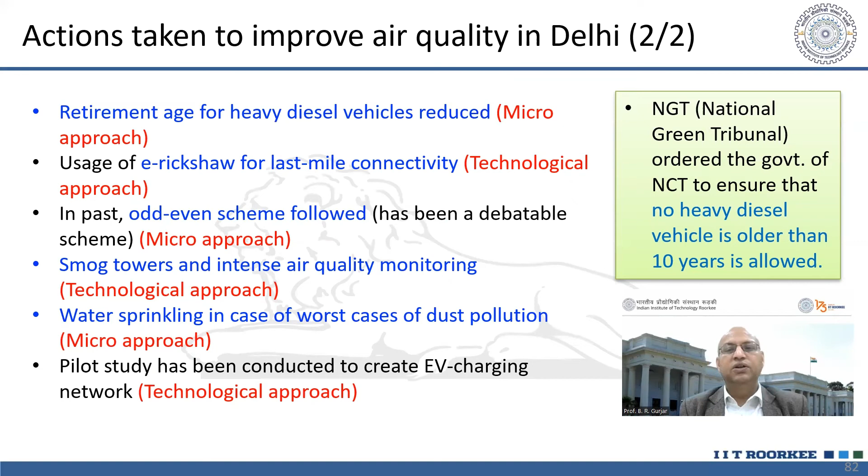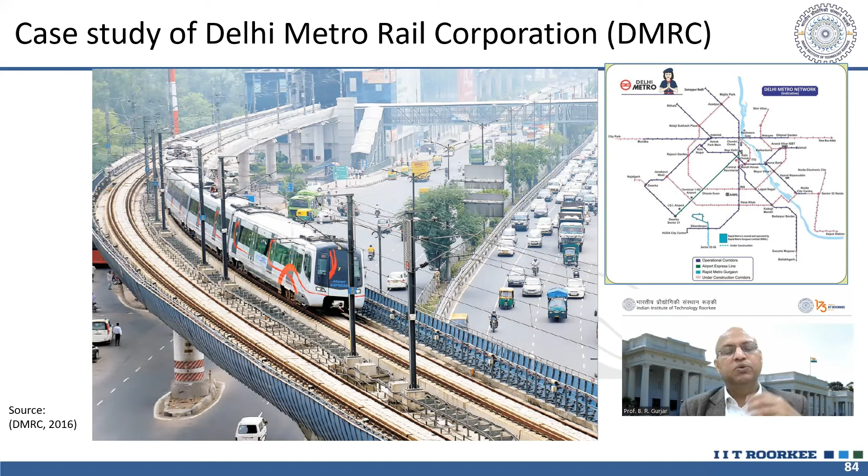Now this last module of the presentation is related to sustainable transportation systems, and Delhi Metro has been taken as a case study. You can look into this case study in a very encouraging and motivating way, because the results are wonderful, a success story.

If we compare unit energy consumed, considering metro consuming 1 unit, buses consume 3 units, two-wheelers need 5 units, AC buses need 6, petrol cars need 21, diesel cars need 21. So metro is a very efficient way of commutation, the most energy efficient transportation system at present compared with other alternatives.

There are several benefits, because fuel saving is there as it runs through electricity, and it takes off private automobiles from the road, so congestion is reduced.

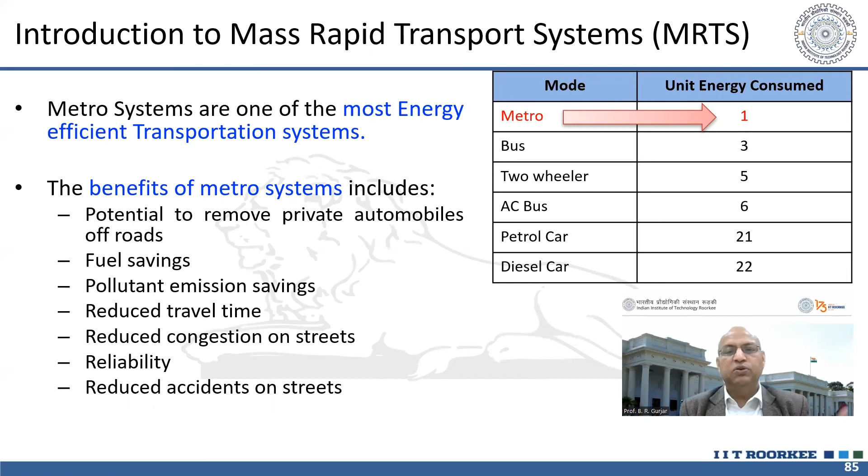Travel time is reduced because there is no traffic jam, and speed is very high in comparison to our privately owned vehicles. There is emission reduction. Then reliability, because the timetable is fixed and it runs on time. There is no accident on the streets, unlike rash driving which causes accidents.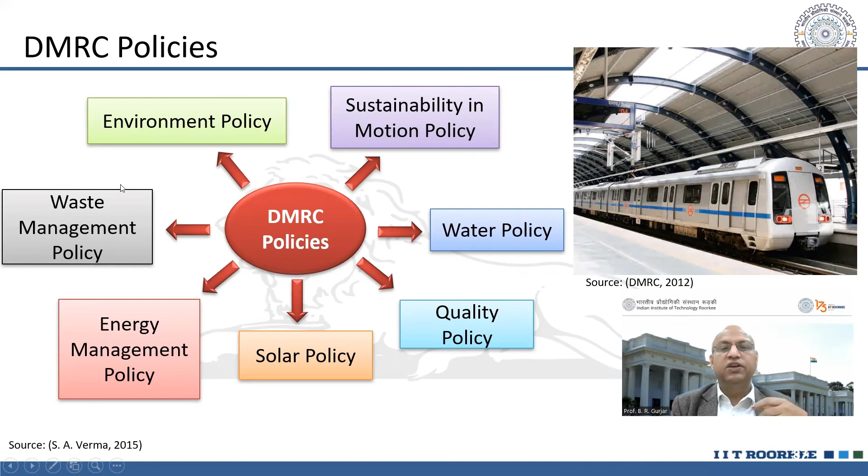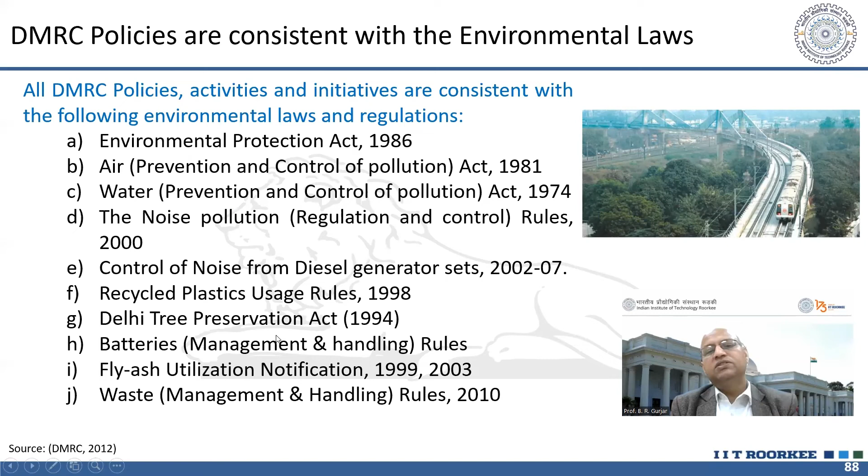Then there are very environment friendly policies by DMRC which have been incorporated to operate this Delhi Metro. There are water policy or quality related policy, solar policy, energy management policy, waste management policy, environment policy. All these policies have been incorporated, and all environmental laws and regulations like Environmental Protection Act, whatever is there, all these provisions are there in operation of this metro.

When we talk about green initiatives taken by metro, there are good indicators. This is a success story in terms of the Green Leadership Award of 2019, which it won. Metro Bhavan is rated as a green building as per the US Green Building Council. All phase 3 metro stations and depots are designed and constructed according to the platinum level, the highest green rating system. There are green stations, so 30 to 35% energy saving is there.

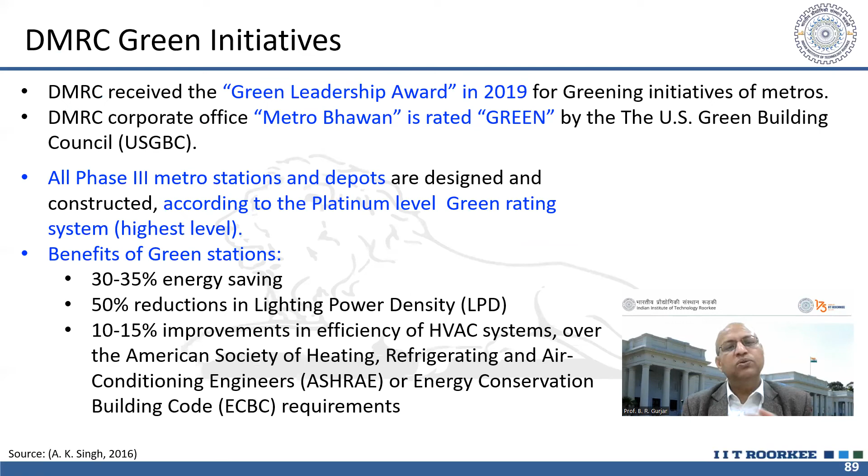There is 50% reduction in lighting power density because smart lights have been incorporated at various places. So 10 to 15% improvement in efficiency of heating, ventilation, and air conditioning systems, as per the American Society of Heating, Refrigerating, and Air Conditioning, and energy conservation building code requirements. All these international standards have been properly fulfilled in DMRC's activities.

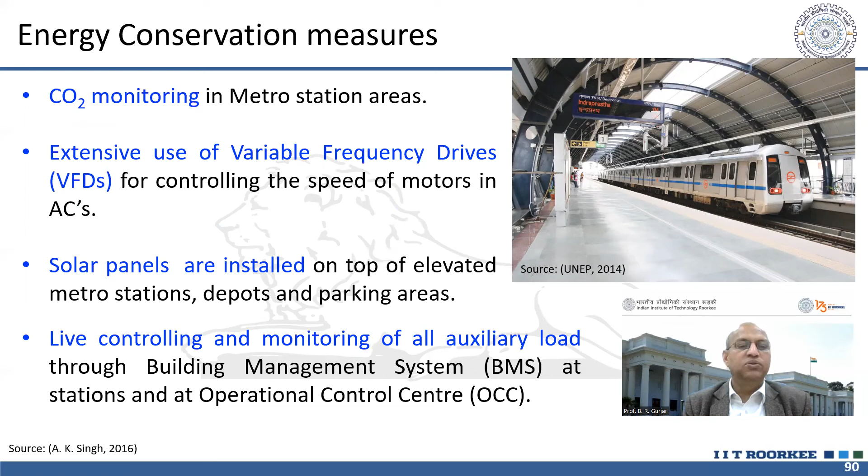CO2 monitoring is there in areas so that no suffocation occurs, and good ventilation system is there. Extensive use of variable frequency drives is there to control the speed of the motors of the ACs as per air quality. Solar panels are installed on top of elevated metro stations, depots and parking areas, so a lot of solar energy is being converted into electricity. Live controlling and monitoring of all auxiliary load through building management system is there, so very advanced technologies have been used for running this system in an energy efficient way.

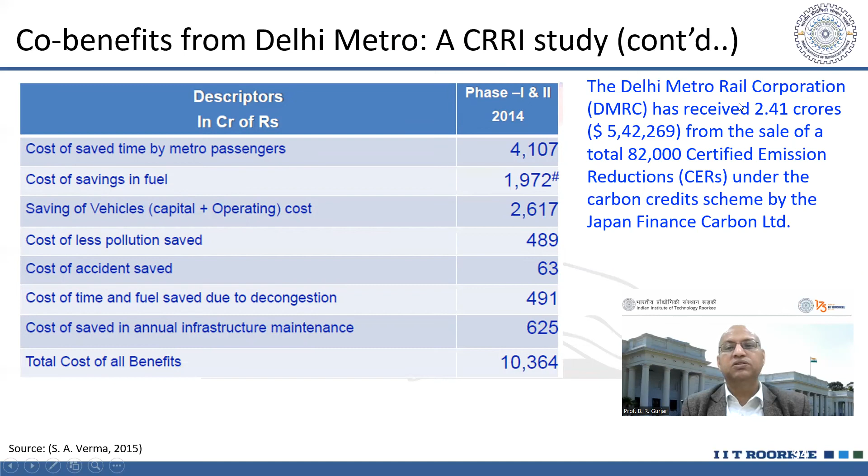The Delhi Metro Rail Corporation has received around 2.41 crore from the sale of a total of 82,000 certified emission reductions, carried out through different measures they have incorporated. This carbon credit scheme by Japan Finance Carbon Limited has enabled this metro system to earn 2.41 crore through these efforts.

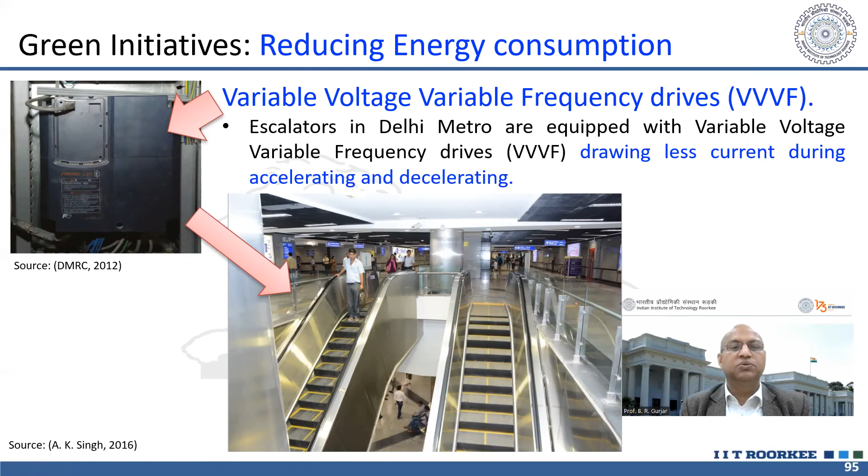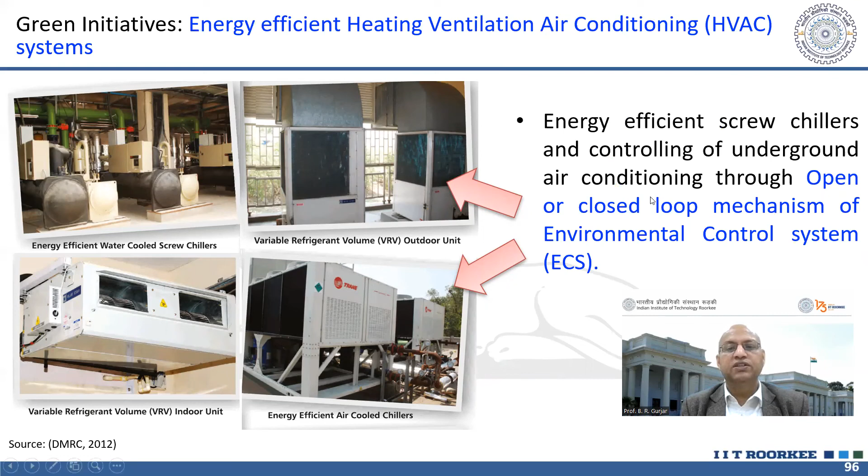There are other initiatives to reduce energy consumption, like using variable voltage, variable frequency drives so that less current is used during acceleration and deceleration of these systems. Also, heating, ventilation, and air conditioning systems use advanced technologies which can control output as per temperature, humidity, etc. So an open or closed loop mechanism of environmental control system has been used to get very efficient working.

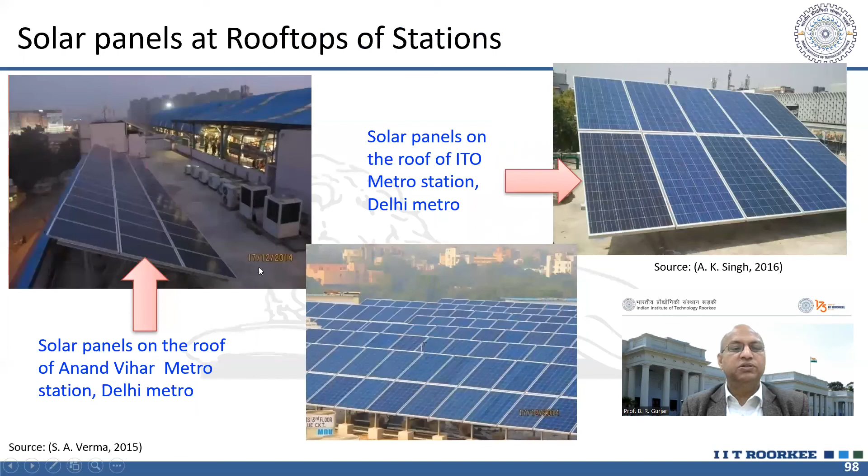Solar power plants at depots and stations are being used, converting solar energy into electricity. You can see this at ITO metro station and Anand Vihar metro station. These pictures show good landscaping, so aesthetically it looks beautiful, and the space is properly designed.

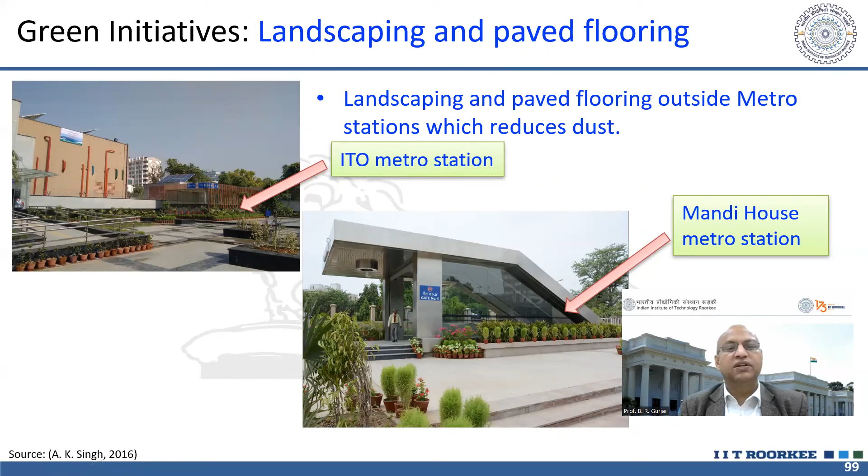At ITO metro station and Mandi House metro station, landscaping and paved flooring outside the metro stations reduces dust. So there's a double benefit: it's aesthetically pleasing, and it reduces resuspension of dust-related pollution. Then there's the waste-to-energy powered metro, the first metro in India receiving power generated from a waste-to-energy plant.

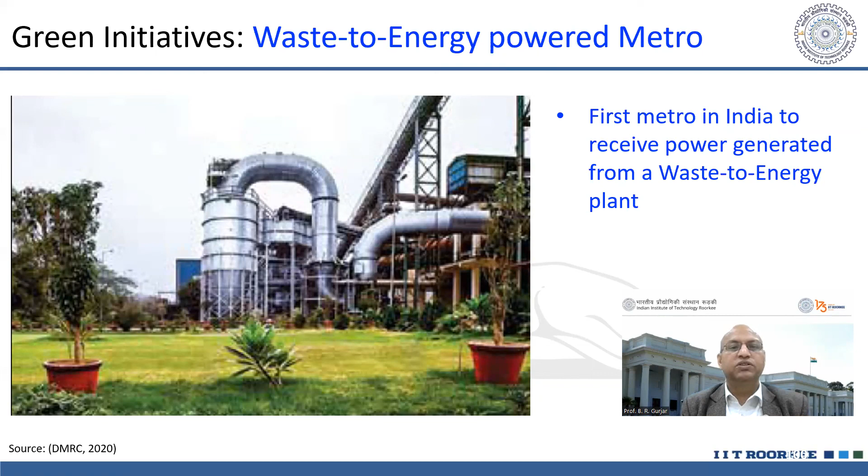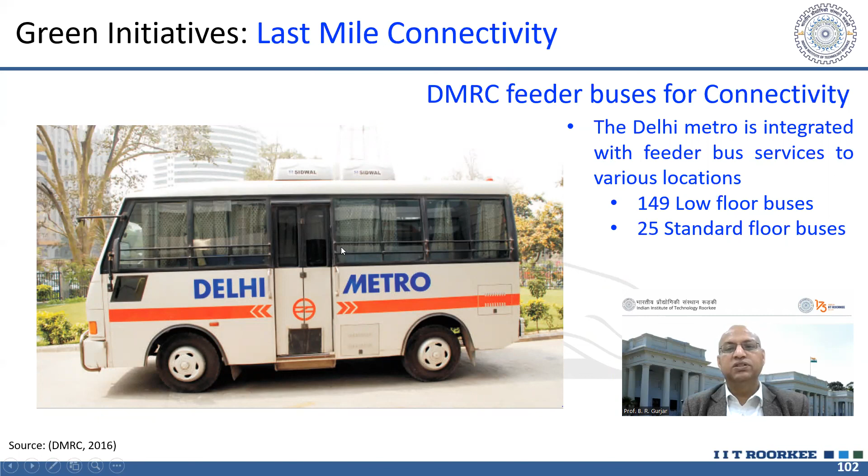Then there are feeder systems for last mile connectivity, low floor buses and standard floor buses. A bicycle system is also there at certain places, like 18 lots on an experimental basis, and people are increasingly using those things.

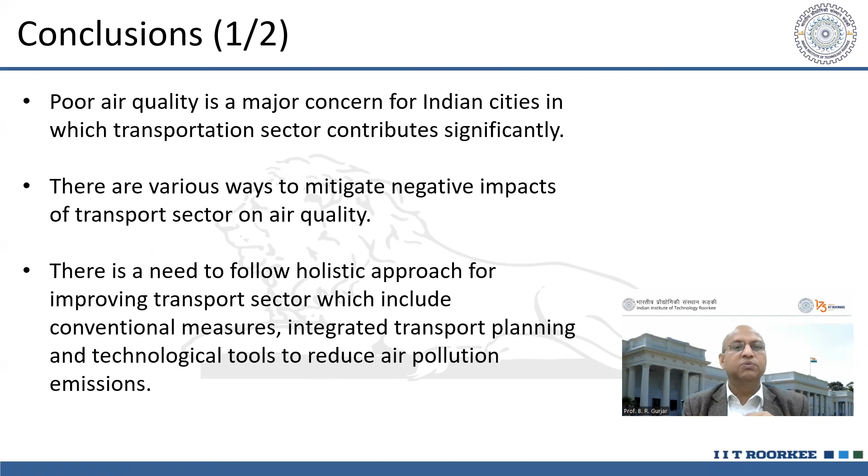We can conclude by saying that poor air quality is a major concern in Indian cities, and one of the major contributors to that poor quality is transport sector related emission. So there are various ways to mitigate negative impacts of the transportation sector so that we can improve air quality, and there is a need for a holistic approach so that we can integrate different kinds of transport modes, with multimodal, non-motorized, and public transportation systems integrated together. That will not only reduce emissions and pollution, but also help us live a healthy life.

Similarly, transit oriented development (TOD), as we have seen in Delhi Metro or some BRTS systems, can be promoted so that people use their private vehicles as little as possible, instead using NMTs to reach metro stations or BRTS systems and then go anywhere they want, with minimum spending, minimum emission, and minimum time. So there are a lot of advantages to going for this integrated transportation system.

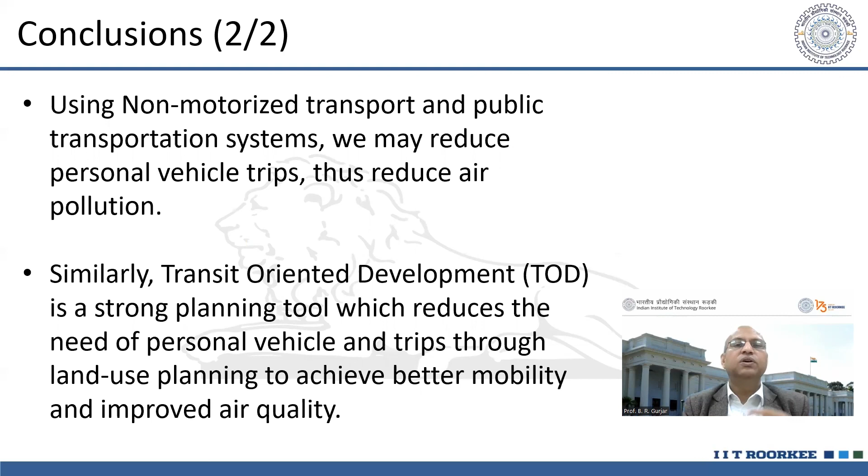This is the role of transportation systems in a city action plan, and I hope you will apply this learning which we have discussed, in terms of case studies and different concepts, in your own city. But as I said initially, each city has its own peculiar character, so please look into that character, and accordingly suggest how transportation can be shifted from privately owned fossil fuel based automobiles to either NMT or public transportation systems.